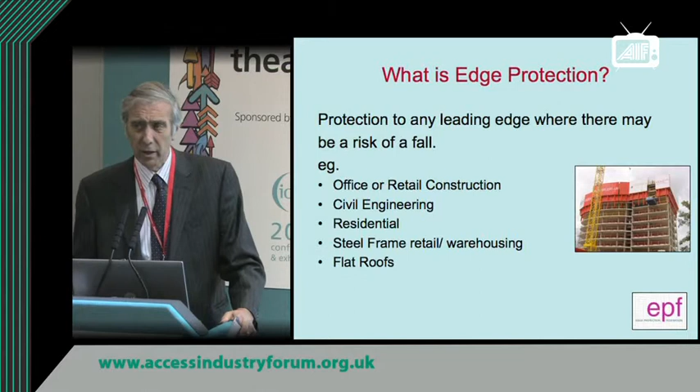I need to define edge protection quickly: it is protection against falls at any leading edge. Generally this will exclude scaffolding, so you'll begin to imagine the sort of structures we're talking about, where there is no effective protection unless provided by a particular method or system, because scaffolding, by this definition, will not be there. These structures are primarily within the construction industry, but not exclusively so, and include things like flat roofs as well.

I ought to mention the EPF, since the Edge Protection Federation may be an organisation you're not familiar with. The sort of services we intend to provide centre very much around being a forum for looking at edge protection issues within the industry. By its nature as a new organisation and a new industry, it's one that is changing, and there are lots of questions arising within our client marketplace, as well as many more issues arising from some of the equipment and building techniques being followed.

The membership is deliberately quite tight, but also quite focused. These are people that are specialists mainly in the field of edge protection, but also include people with an enormous amount of experience in the scaffolding, falsework and formwork industries, which are very much at the heart of some of the applications we're talking about in this area. So that's the membership of the Edge Protection Federation.

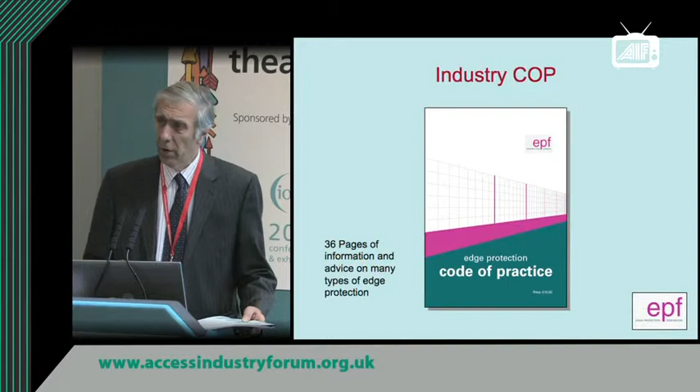It has also put some of its knowledge into words. If you stay for the other sessions, you'll hear mention of some of the advice and information available. The Edge Protection Code of Practice is a good example, because it goes a lot further than the design information I'm about to talk about, giving you 36 pages of advice and guidance about best practice and the use of various types of equipment and applications covering edge protection. It's a very useful guide - unfortunately not a freebie, but very reasonably priced and available.

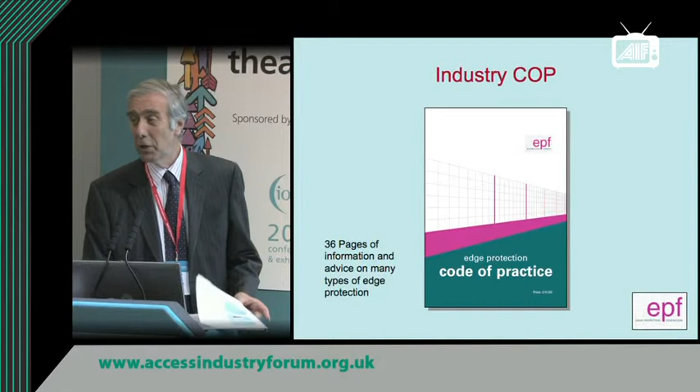So, into the type of work. In terms of applications, these are the sort of projects we'll be talking about: concrete slab, steel frame, industrial steel frame - which are different again - flat roofs, and the more recent area of climbing edge protection.

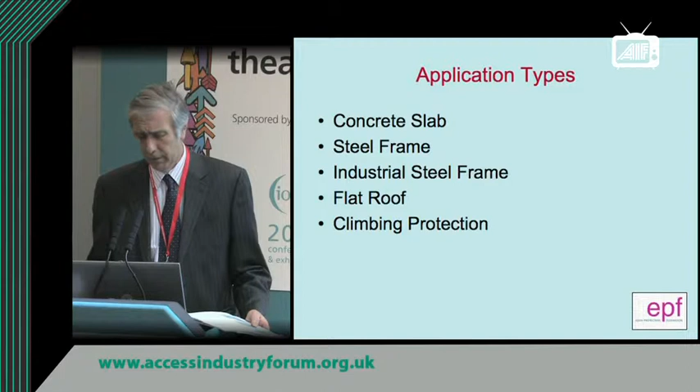I thought it's worth mentioning the thing that underpins the applications covered by the edge protection industry: this document, BS EN 13374, which may not be a name or number that trips off the lips. Nevertheless, it's been quite a powerful document, because since it came in, it has spawned a whole industry in itself, and it's effectively ruled out the use of traditional methods like tube and fittings on hundreds and hundreds of projects throughout the UK, to the extent that tube and fittings is now the minority of edge protection in the UK, and these sort of systems are now very much the majority.

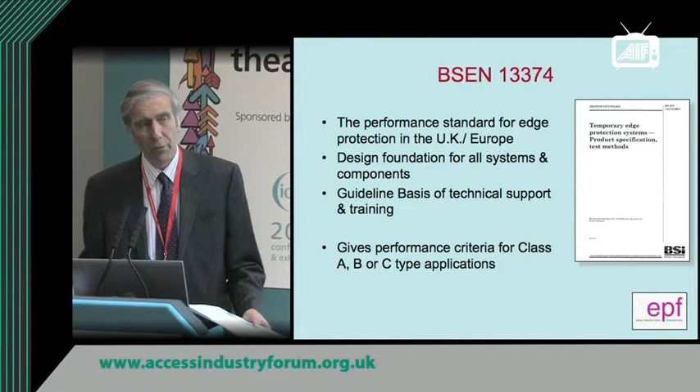This standard provides the performance verification for all the products used in the applications I'm about to touch on. The design foundation is our guideline, advising us on the technical support and training support we provide as an industry. There are three classifications: Classes A, B, and C, although most sit within Class A. Class A covers mainly flat surfaces with static loadings. Where you're talking about slight slopes, that comes into Class B, and more substantial slopes are within Class C, which is a very different animal.

So selecting equipment, as Alison mentioned earlier on, very much requires making sure that the right classification of equipment is being used.

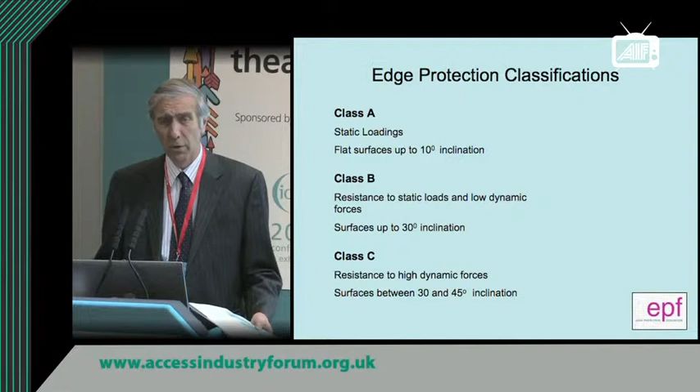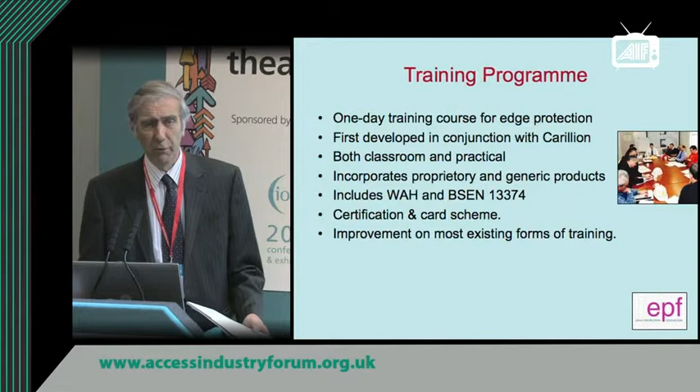There's a training program as well, run by the EPF, because given the hazardous nature of this sort of application - stopping people from falling off leading edges that may be from buildings 25 stories high - yet some of the training for these applications is based on a 15 or 20 minute toolbox talk, which clearly we think is totally inadequate. So the one-day training program goes much further, giving a great deal of advice based on specific systems, but also a lot of the generic information available to the Edge Protection Federation.

So that, by way of general introduction, gives you an idea of the background of this industry and the fact that BS EN 13374 lies at the heart of it, giving us a marker point, a datum point, to judge the performance of any of the solutions provided.

So let me now just outline some of the types of equipment, types of applications that we're talking about.

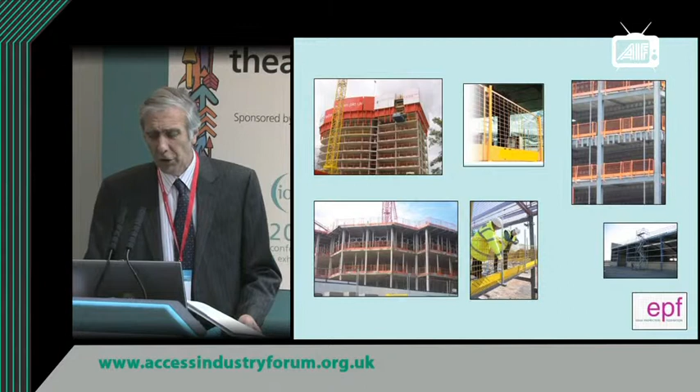Some of these colours will be familiar to you if you drive up and down the country from time to time. You don't have to be on a construction site or in the centre of the city to see them. They're one of the visual impact signs of the edge protection industry, as these are the emblems of particular companies, suppliers and contractors, in their own house colours, indicating that a safe method of edge protection is in place and reliable. It's given us a bit of a new landscape within the construction industry.

Those barrier frames, those colours, are used throughout most, but not all, of the applications that we encounter.

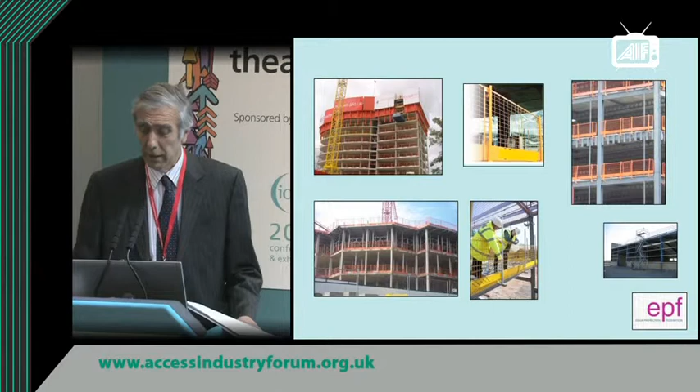So into some of those applications - the most common one, I suppose, is with concrete slabs. This is where poured and cured concrete is available for fixing into, and the insertion of socket bases goes into usually drilled anchors, using things like Hilti anchor fixings, that give us the reassurance of a solid basis of support for a series of posts and panels. That's the basis behind the edge protection we're talking about with concrete slabs.

But it isn't just drilled or drop-in anchors. It's also clamping components that can clamp to the edge of those slabs, or to upstand beams and similar features, but can also clamp onto the aluminium formwork beams used prior to the concrete being poured. So these clamping and drilled-in anchorings are what would typify most concrete slab, concrete frame applications.

And as I said, these are all Class A type systems because they're likely to be more or less flat surfaces being fixed into, and in a way, they are reasonably predictable.

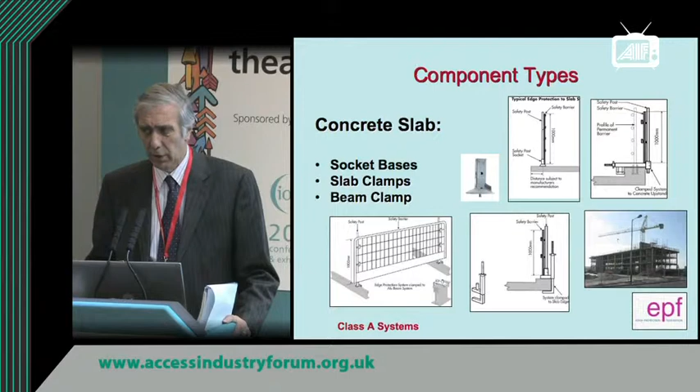The ones that are less predictable, I'd suggest, are the emerging areas of steel frame. Steel frame construction has become very popular in the UK in the last few years, but it's presented its own fair share of problems, because it seems to somehow give rein to highly variable and quite exciting designs of structures. For the edge protection industry, as in the scaffolding industry, it can present quite a few problems because each building can be individual, and that's why there are quite a lot of individual fixings that have been designed for those.

The most typical ones are where we're providing bolted-in fixings using cantilever brackets that then allow room for the concrete oversail and some other edge profile details.

Most importantly, this is probably the classic example of the work at height regulations in practice, because the way in which these are installed is to pre-drill the steelwork while it's still in the factory, to the dimensions specified by the suppliers of those brackets, so that when the steelwork arrives on site, the brackets can be prefixed on the ground, the edge protection installed on the ground, and then craned into place. So it isn't necessary to expose the workers to risk when installing it at height - that part of the process can be removed by this method of prefixing installation. I think it's a great example of avoiding risks of working at height in this area.

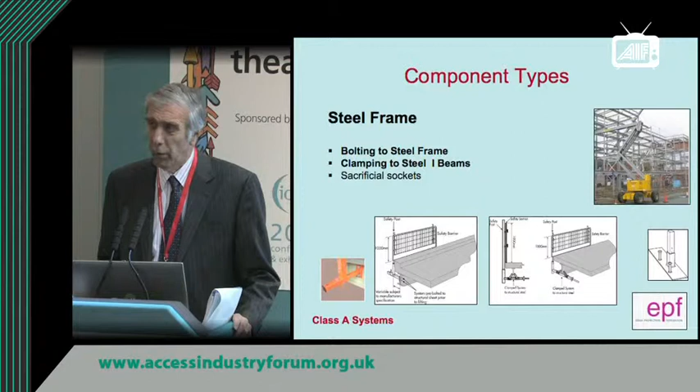There are other variations to steel frame. The welded sockets are a simple example where they'll pre-weld a socket to take a simple post. That has been quite a common method, but it has begun to change more in favour of these systems, and I personally believe it will change far more significantly once the new BS EN 13374 comes in, because one of the requirements is that this type of fixing will probably no longer be acceptable.

But there are other issues we face where there are particular cladding details, extensions to the face of the building with the steelwork, with the design, where we're needing larger and larger cantilevers to the edge protection in order to push it further out from the face of the building to clear those sort of features.

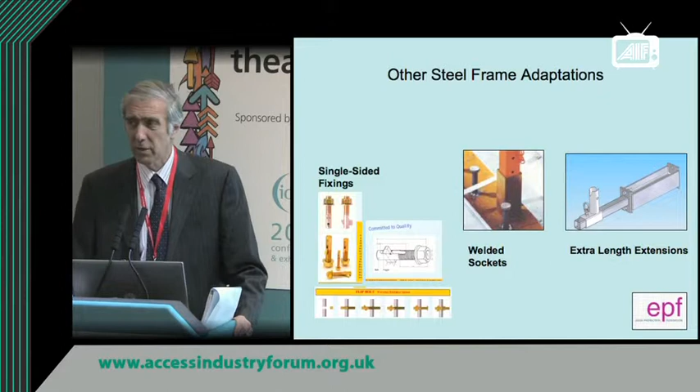And there are also issues about the removal of some of these components afterwards, and that's why some of the single-sided fixings are also becoming a bit of a requirement, where box sections are being detailed from time to time at these building edges, making it very difficult to get fixings into. So again, single-sided fixings are being used in some places as a way of solving that particular problem.

Then we have industrial steel frame, which is different again. I'm thinking about applications like Asda and Morrisons as well as industrial warehouses. Some of the unusual names you see, like stub clamps and gable brackets, are signs of a more specialised side of the industry adapting to quite individual applications, very much at eaves level, in order to try to comply with 13374, where the optimum amount of steelwork in the structure makes it quite difficult.

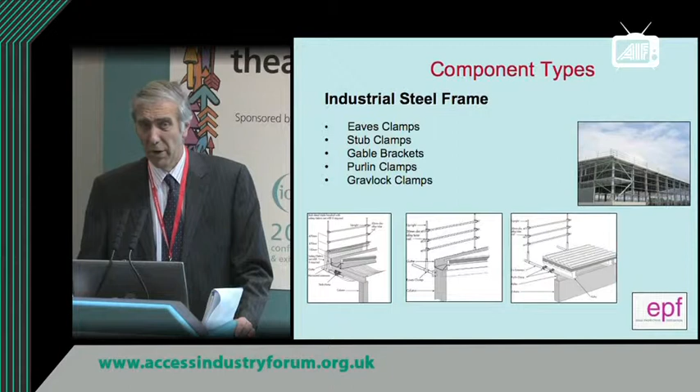Where the columns are spaced 8, 9 or 10 meters apart, with only cold rolled sections in between, it's quite difficult to achieve compliance with these systems. I think a lot of the systems in use may be in question, and we may find some needing to change because I'm not sure many of them actually comply with Class A.

And then finally we come into Class C type systems. These are for steeply sloping applications, and we don't have too many of those in the UK, but these netting solutions are also used where all else fails, where there isn't a safe method of achieving a guardrail in complex building designs. Sometimes the only solution is to install side netting and netting underslung to give the right sort of protection, even if it's potentially fall arrest, to the worker on those applications.

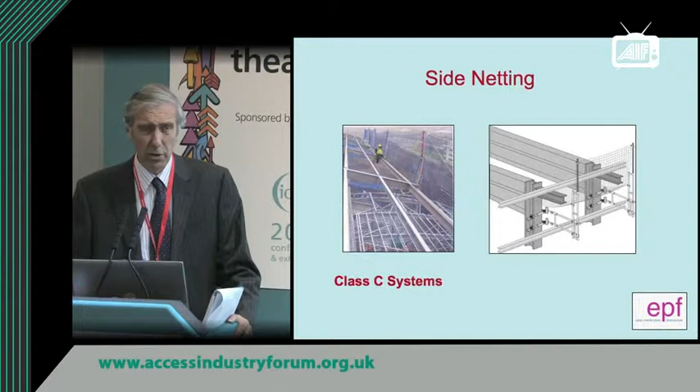Now, I haven't given examples of Class B, but visually they will be quite similar to some of the industrial steel frame applications.

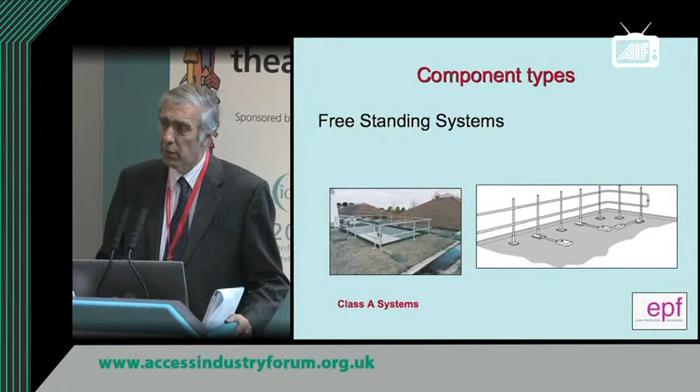And then we have freestanding systems, which are different again, because these are the sort of edge protection you'll find on roofs for both temporary and permanent applications on flat roofs. You'll find these systems in use, which have replaced a lot of the traditional scaffolding applications. We still see scaffolding A-frames used, which don't comply with anything. So more and more these freestanding systems, which are counterweighted and don't involve drilling into the roof surface, are being used, but they also have a performance requirement under the 13374 standard.

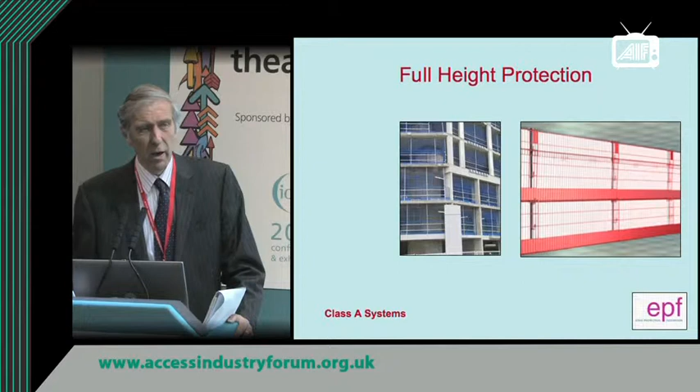Now, in terms of more recent changes, one of the quite topical issues at the moment is about full height protection. If any of you have visited the Olympic Park while the Olympic Village was being constructed, you'd have seen a lot of this. It's a demand by certain contractors to give the maximum amount of protection to avoid any objects being allowed to fall from that structure.

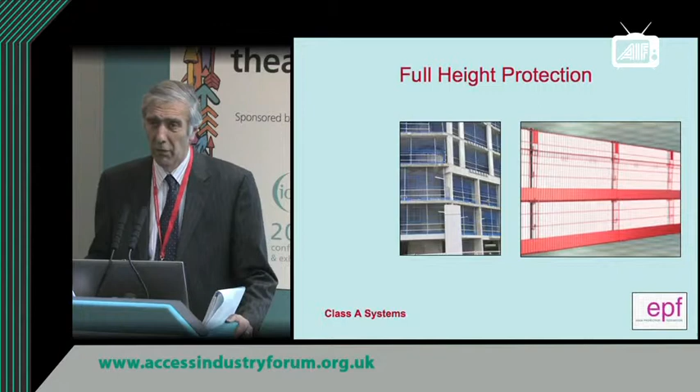And it's full floor to soffit protection. The issue for the industry is that there isn't, strictly speaking, a standard for that type of edge protection. That's something that yet needs to be clarified.

And climbing screens is another very topical subject at the moment. If anybody wanders near London Bridge, you'll see the Shard going up, which has a number of climbing screens on it, the shape, size and scale of which changes with every floor level.

Climbing screens are a way of reducing risk by providing several levels of protection from one floor level below, so that the steel workers and concrete workers can have a level of protection they wouldn't otherwise have with any other edge protection method.

I think you can draw a parallel here with the advanced guard railing steps being taken throughout the access industry, where the protection is there in advance of people accessing those floors. So climbing screens is very much new technology based on small hydraulic pumps, and I think is very much a sign of some of the systems to come in the future.

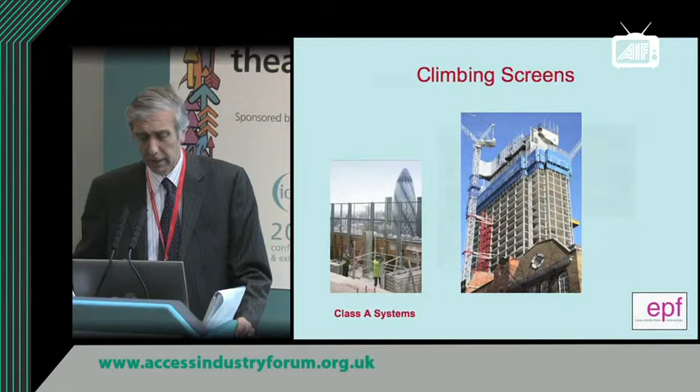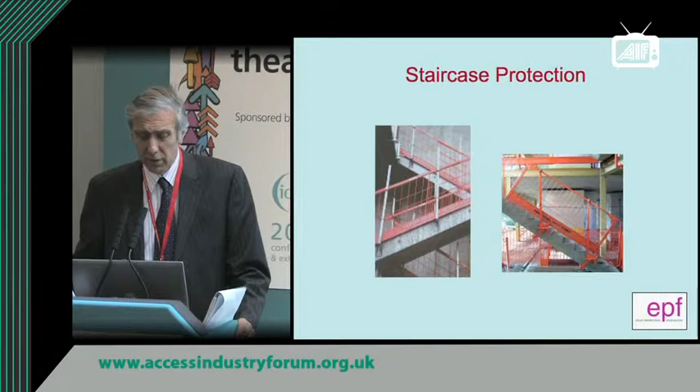We shouldn't forget the traditional adaptations where you can still make use of scaffold tube, putting these systems onto concrete staircases as well, where they're needing to find solutions to stopping people falling off the edge of vehicles — that's another relatively new edge protection application. And the use of protection fans, to stop men, women and materials falling out of buildings.

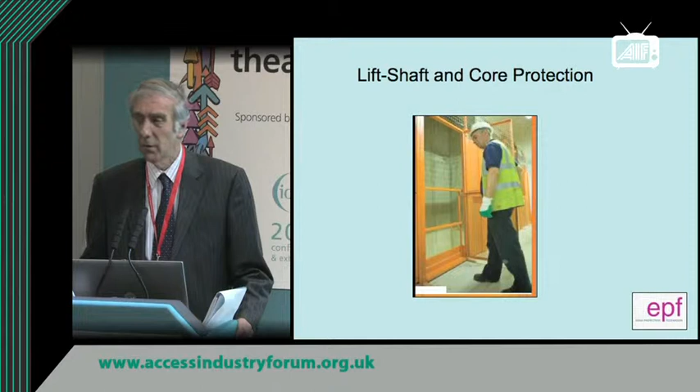As you can see, that's a Class A type system too. And then we have more unusual things like lift shaft protection. So finally, we have ground-based protection using the same systems and these industry issues.

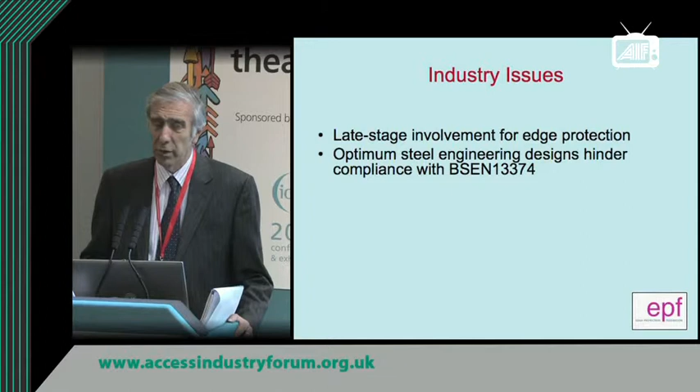The fact that we're not involved as an industry early enough, particularly with these many varied steel designs, is a real problem. This is a real CDM issue — that they're optimizing the design of the steelwork but not considering how we provide safe edge protection that complies with the standard, including full height protection and what standard that should comply with.

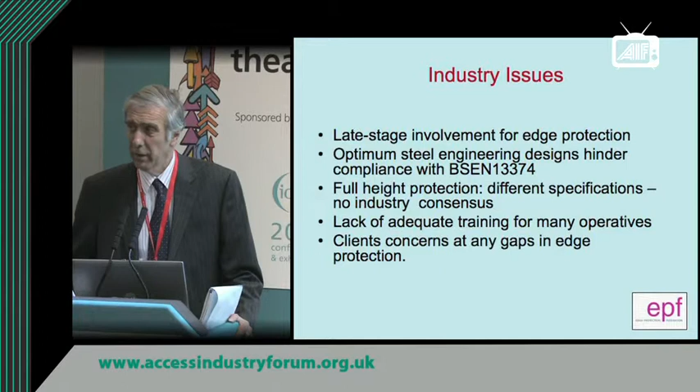The fact that even now there is inadequate training being given, I'd say, on the majority of edge protection applications in the UK. And more recently, the concern of clients for tighter and tighter gaps to reduce the chance of any small object falling out of the building. That can present real challenges for our industry.